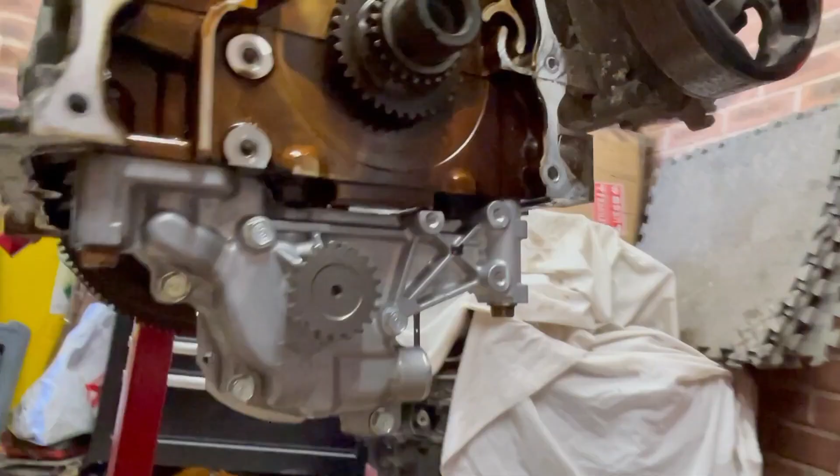As some of you may be aware, on the K24 there's a huge oil pump which has a balance shaft in it, and in order for it to be a bit more free revving, you fit a K20A2 or the oil pump off of a K20Z. We had to do a bit of notching on this oil pump, because otherwise it doesn't fit with the K24 girdle.

All I'm waiting on is an oil pump chain, and I've already got the tensioner for that. We've got a few goodies that have just arrived, but we need to get that chain in place before I can actually put all the guides on for the timing chain and the tensioner.

Today I picked up some K20A2 cams, because in the K24 A3 the cams are all right, I think mainly for boost applications, but this is going to stay NA for the time being. We've got a few other tasty little bits which I'll show you.

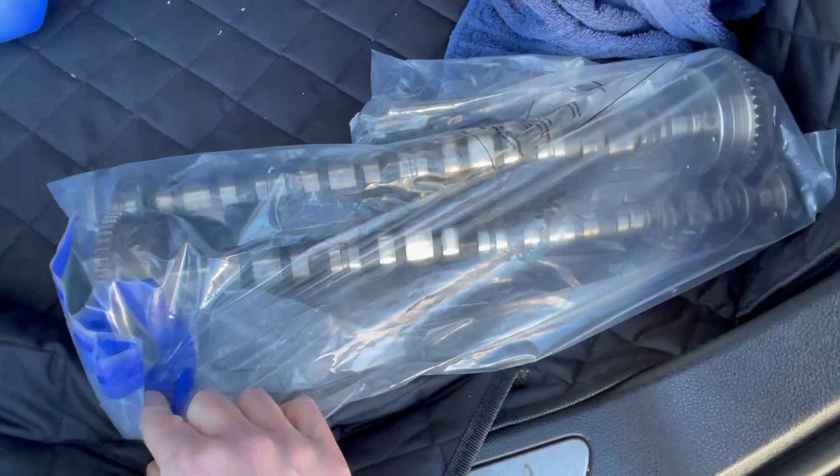As well as those other bits, ignore the carpet samples, I've just been today to pick up the K20A2 cams with the K20A2 VTC gear. This will be perfect for the K24, giving us a bit more capability of revving higher, and plus these are a bit better of a cam to put in the K24.

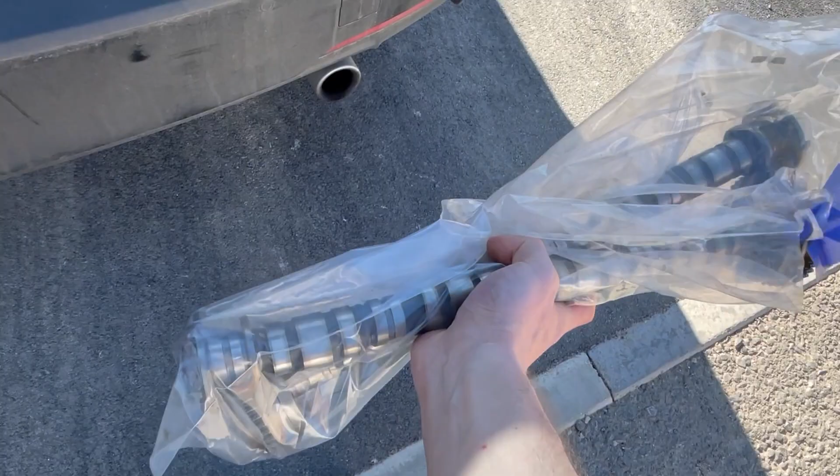All I'm going to do is just clean them up, give them a quick wipe down, get these added in and put the retainers on, then should be able to just put the cam cover back on to keep it sealed up a bit more from dust, then we'll move on to something else while I wait for the other bits to come.

Siri's trying to talk to me. I didn't catch that, could you try again? We're filming some YouTube here, lad. What's going on? Okay, searching for YouTube on the App Store.

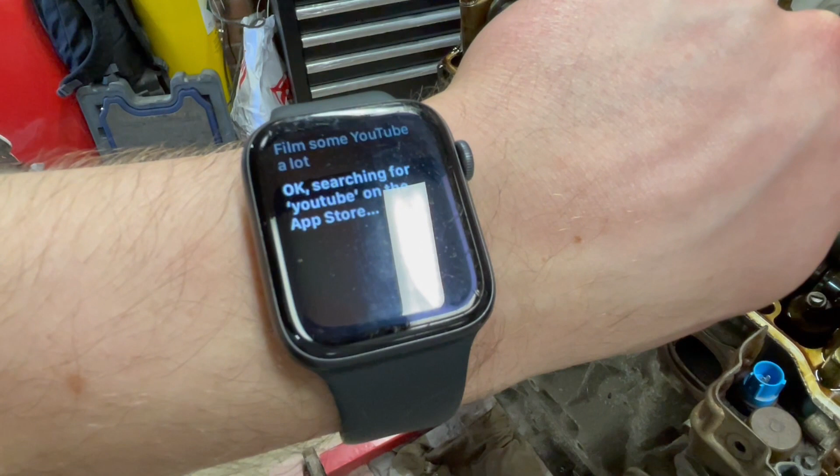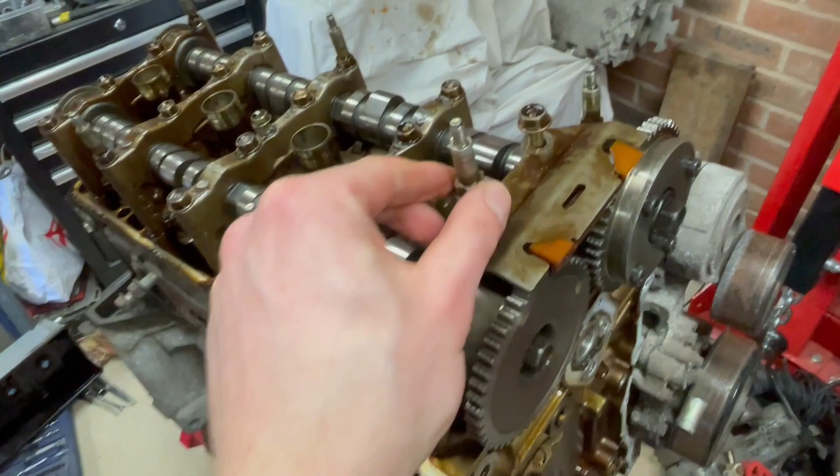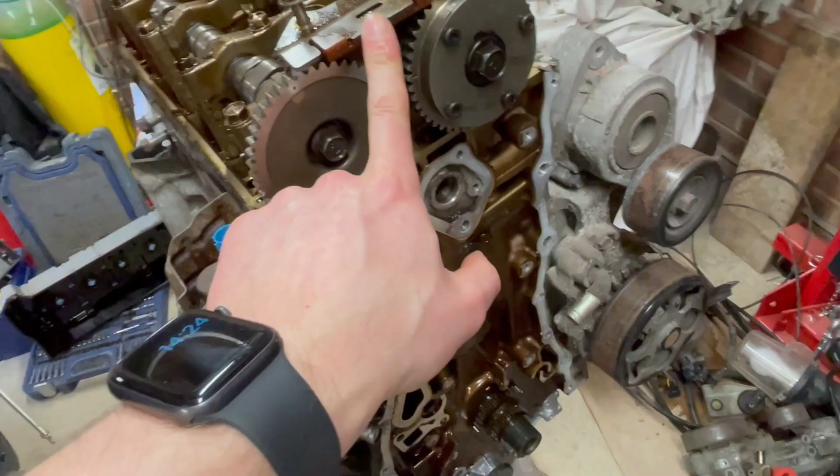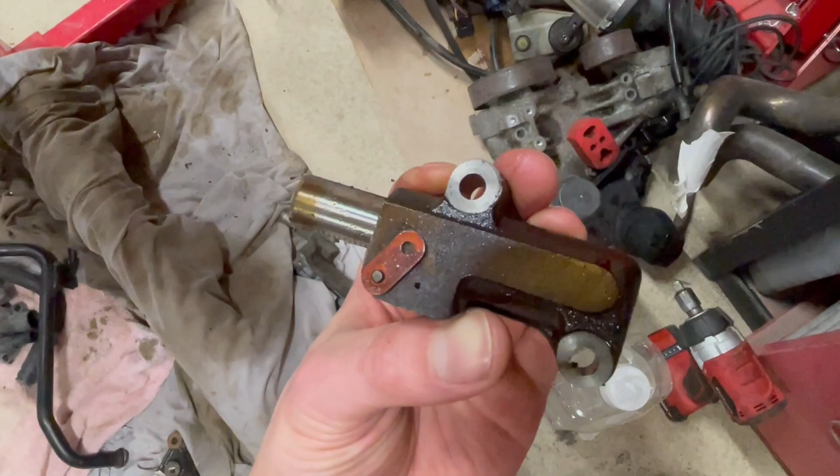I've got a new one, so I don't want to put any of the new bits on just yet until I get my tensioner. You can see the old tensioner just sat there, covered in whatever that is. Got a new one of these on order, still waiting for it to arrive. Once I get that, then I can at least put all this together, as well, like I mentioned before, the chain for the oil pump.

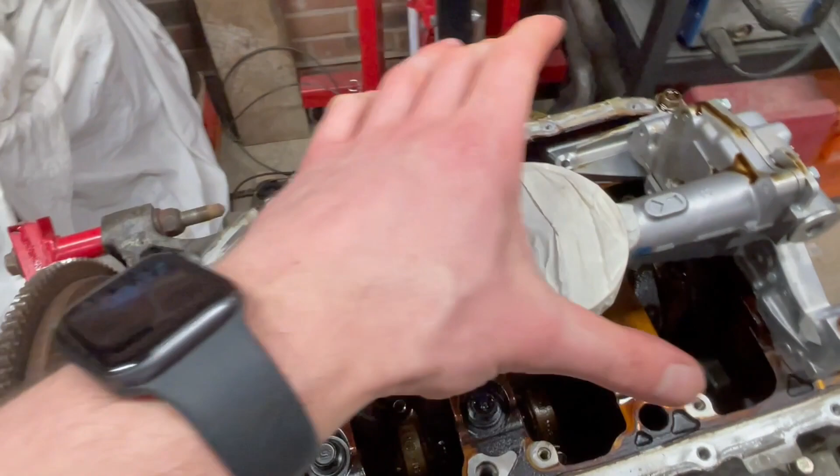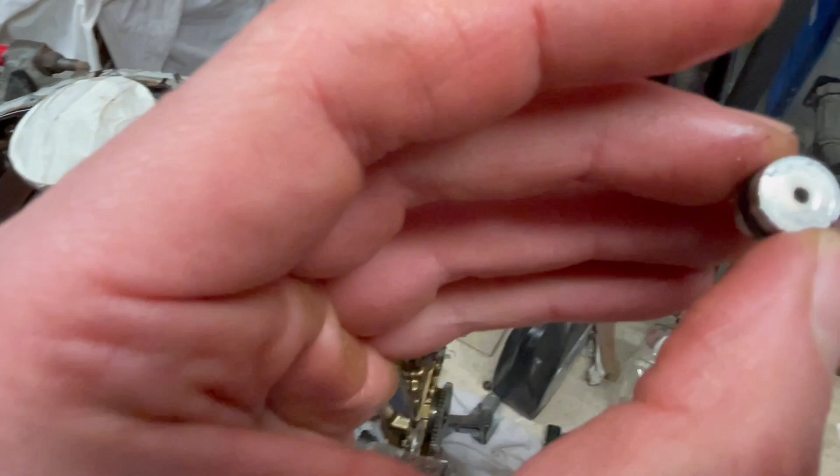So now we've spun it over. The reason why I wanted to show you is that on the K24, I've already taken it out, but when you have this huge oil pump, you have - makes me get my trusty pencil - this little jobber. It's a little bung, well, it's not a bung, it's got a tiny little hole in the middle of it. So this sits here on this one.

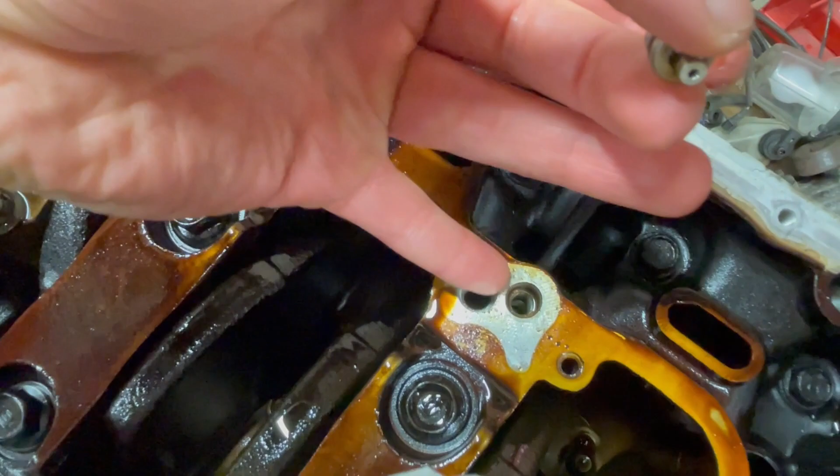If you don't blank this off - you've probably heard it quite a few times - but if you don't blank that off, you get a drop in oil pressure because there's nothing there to receive the oil out of this. So what you have to do is block it up and seal it up with a bit of Honda Bond.

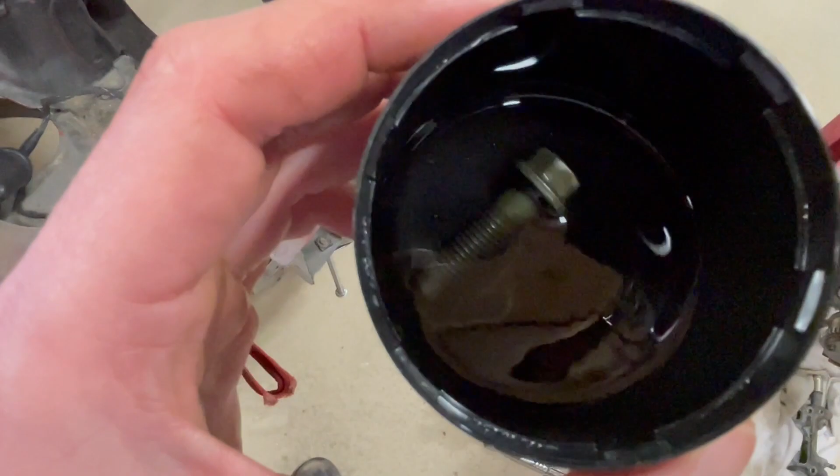Went through my trusty rusty bolt selection and come across this lovely bolt. I think it's probably from an MX-5 that I had before, God knows where it's from. I've sat it in some thinners just to make sure there's no nasty stuff on it, and bung that hole up, that tasty one there.

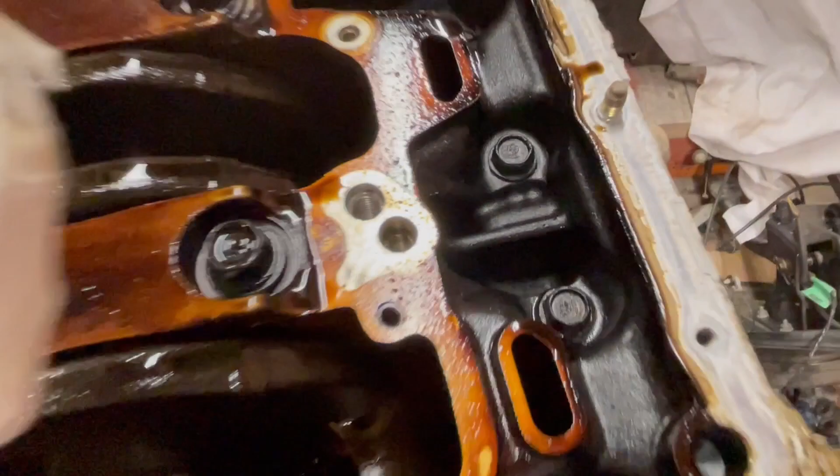Bung it up with a bit of Honda Bond, and then we're pretty much good to go. So like I said, we're still waiting on some bits, so obviously I don't want to put the sump on just yet, so it's a bit of a pain in the ass because I just want to get on with it. But it might be a couple of days yet. There are a few things I can do, like cleaning up the faces on the engine and stuff like that, but otherwise we're going to be focusing on the actual shell. So what I'm going to do, get this bolt in there.

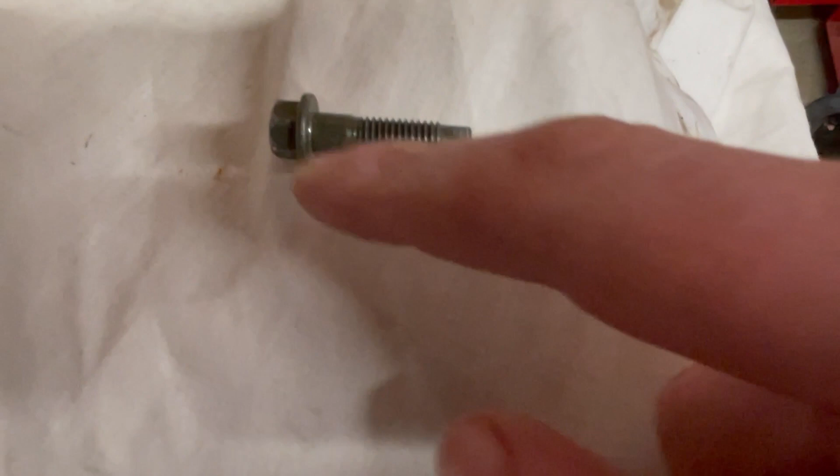Job's a fish. So if you want to know for reference, bolt wise, the bolt is an M8, so there we go, 8mm. Lengthwise is roughly, the one I'm using, around 30mm. It's got this little dolphin nose on the end, so it fits quite nice, and it's got this little shoulder on it. You can just use a straight threaded bolt, but providing it's got something like a top hat to it, like this one, so it's just enough to blank over the top of this.

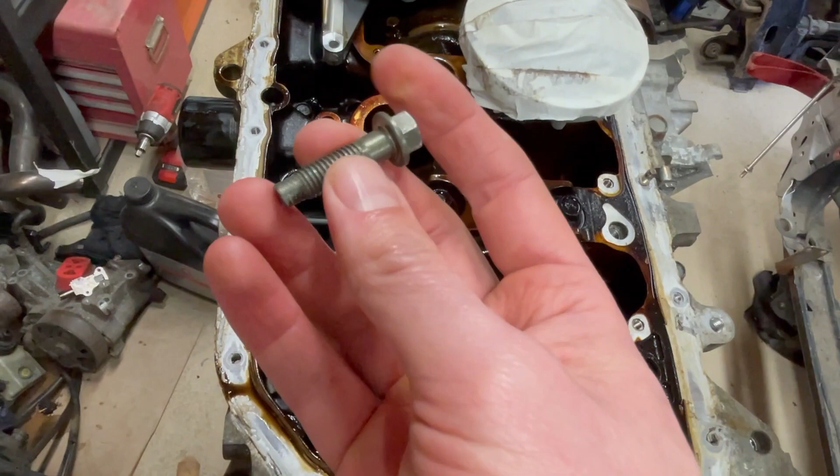I've just given it a bit of a clean, a wipe down again with a bit of paper towel and a bit of thinners on there, just to make sure it's clean enough. So I'm going to bob a bit of Honda Bond on the threads, and then put the bolt in, tighten it up quite nicely, and that'll do the trick.

Right, so that's that in, all tightened up now. It's got Honda Bond on the threads, and I've managed to put some in there - you see on that bolt hole you've got a bit of a shoulder in there as well, so I've put enough in there so it fills the shoulder too. It's all underneath here, and I've just wiped off the excess so that's nice and clean, so we're not going to get any floaters knocking about. I think that's about as much as I can do for now on there.

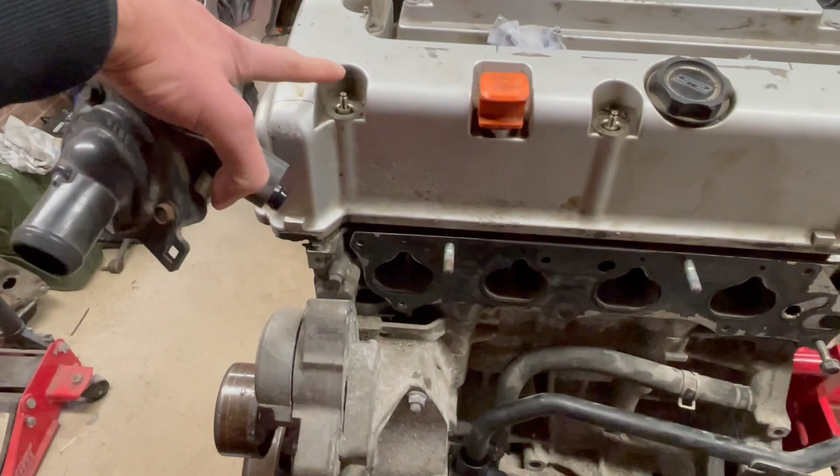Right, so we've got the engine span over, so we've got it all covered up on top. I've tightened those bolts down just so I can actually get the cam cover on properly.

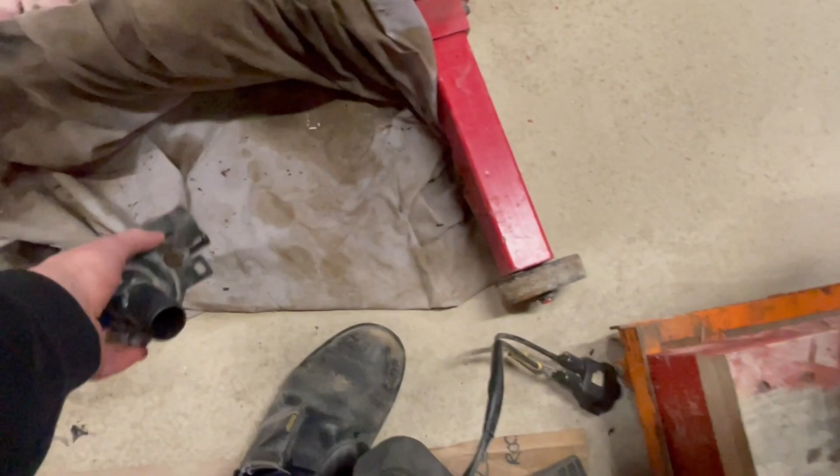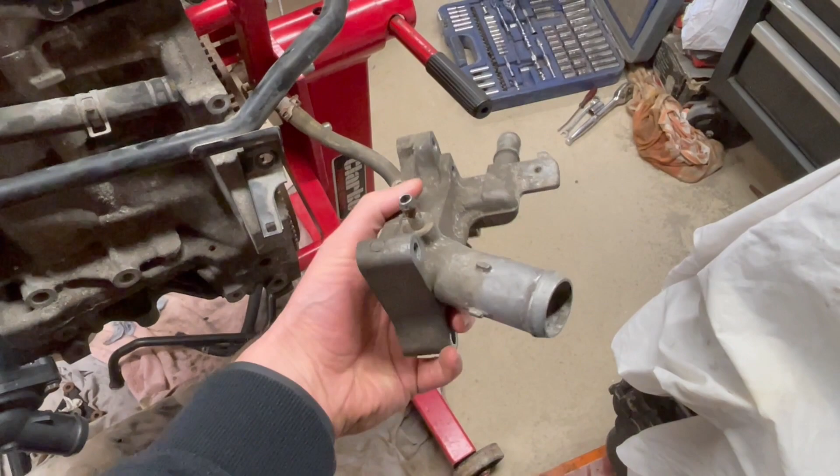And what we have here, thermostat housing - I've just put it on for showing - is I've swapped out the K24 water pump housing. So this is a K20 version, off of this engine, with the K24 pipes added to it. I've changed that because on the K24 version the nose or the snout points up, which means if I have the K20 version on the K24 block, I can use EP3 hoses since it's an EP3. I think I'll probably end up replacing this out when I come to put the K20 in the Williams, probably with this one or maybe a K-tune one later on. So that's no good, don't really need to use this anymore. You have to put the K24 hoses back on because with the K24 you have this water outlet that bolts on the side of the head, and the pipe goes around it. On the K20 you don't have that problem.

So that's a bit of K24 knowledge there. If you're wondering why I wanted a K24 rather than a K20, the K24 has really good performance, better low end torque. It doesn't rev as high, probably into around 8,000 RPM - we'll soon see when we come to do dyno pulls and stuff like that. But yeah, going to use the K24 purely for the lower end torque.

This car will be NA to start off with. There is a plan to use a Rotrex supercharger later on, but all I want to do, because I've never driven an EP3 on track - obviously I've driven Mark 1 Clios before - is get used to the car first, know its behaviours and stuff, then start upping the power afterwards. So we should be good for around, I don't know, 250 horse, the usual standard Honda outputs, maybe a bit more, but you'll have the higher torque figure at the bottom end of the RPMs. So yeah, that's the reasons.

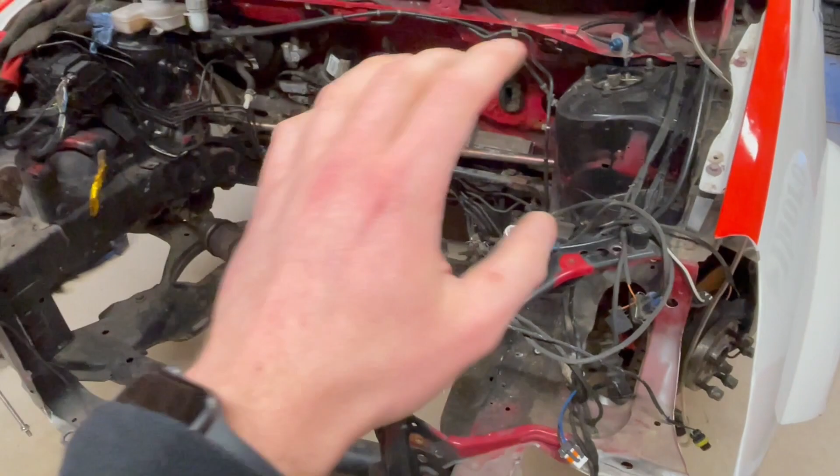So the next bit now is I'm going to jump over to the time lapse, because I'm pretty much done with that. Just going to put a sheet over it to make sure it's dust proof, and we're going to start stripping this down, because I do want to get this engine bay painted and looking nice, because I like things to look nice.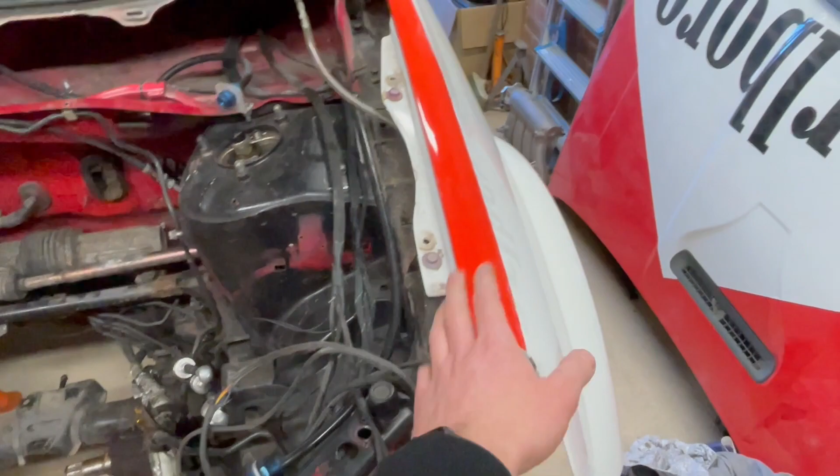So I'm going to get the wings off and get the rack out, get the brake system out, just out of the way, so we can make all this redness white. I think we're actually going to go white this time rather than grey. I think it'll match with the engine bay, plus the touring cars did the same - they were white on the inside, just grey on the cabin. So yeah, let's get at it, let's start stripping it down.

Start with the K24. First observation was the cam. So no, the first thing we did was I put the K20 cams in, and really it's only the K20 inlet cam that we need, so we believe. So we're swapping that out - well, we swapped that out. That's all torqued down now, apart from these two, so we just need to get the guide on top there, but we need to get the chain on with a tensioner.

But also we're just going to do the oil pump side now. The K20 pump does more revolutions for more RPMs coming. So we're just going to flip this over, get the guides on, the tensioner, the chain, everything else, get all that buttoned up, and also get the windage tray in, get that all sorted.

Got some HB? Got some Honda bond, yeah. That's all right, got plenty of Honda bond. That's all you need, if you've got enough of that you can put it together. Maybe we just stick it together with Honda bond. Yeah, I could do that, maybe we need them here.

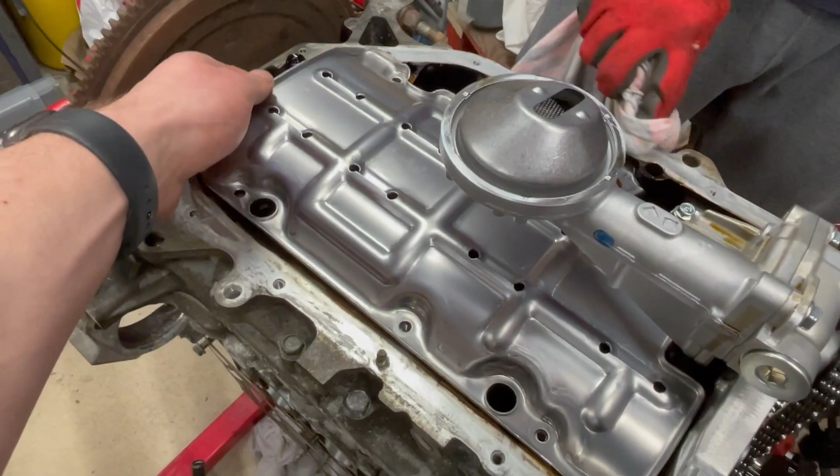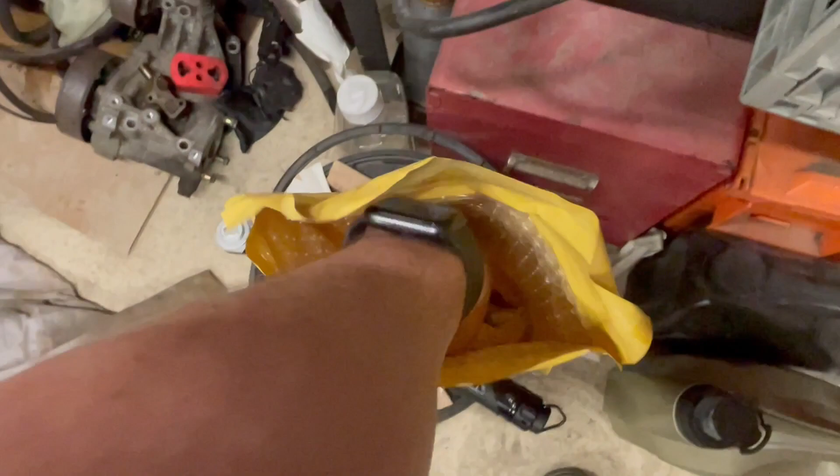Right, so we've just fitted the oil pump chain, just need to put the tensioner on. Just torqued up the new oil pump guide, got a new windage tray - this is from a K20 - and just bolt it straight onto here. As I've shown before, that's all plugged up, that little gallery. This was a kit from Clockwise Motion, and they send out a full kit which has got all the bolts and everything in individual packets. So we're just going to replace a few of these.

So we've got all these little bolts that got to go in here. We're always just having a good old clean up, aren't you, lad?

Time to clean as always. Yeah, that's it, get its mating face nice and clean.

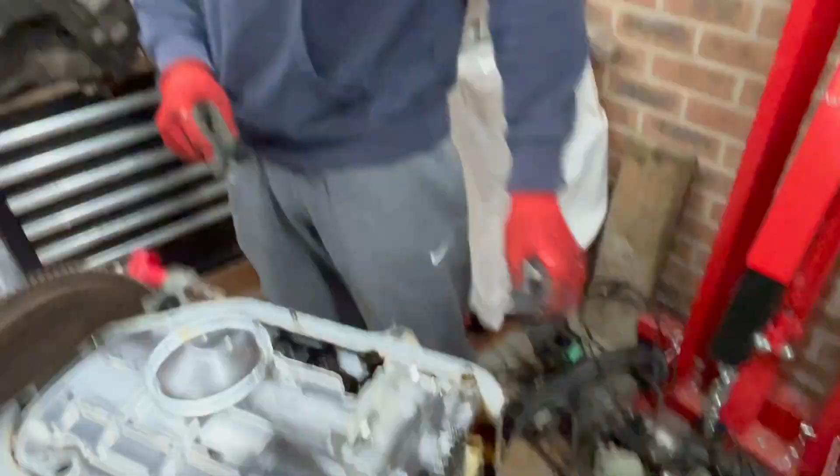Then I end up cleaning my own stuff and then I end up doing everyone else's. Mate, you enjoy this type of thing. I do, mate. Mate, you do. I don't, I just can't see it not done. Mate, straight off you're like, oh I just want to clean this. I don't remember that conversation. There was definitely that conversation.

So yeah, we've got a Blox sump baffle, that's got to go on yet. So we've got some spacers and stuff which sit off these bolts, so I think we might have to replace some of these. Definitely use the instruction manual for this - there we go, got a kit of spacers and all sorts of stuff and a nice little manual.

So where did you get that from in the end? This is from Tegiwa, I think. Nice Blox sticker in there. So we just need to crack on with that.

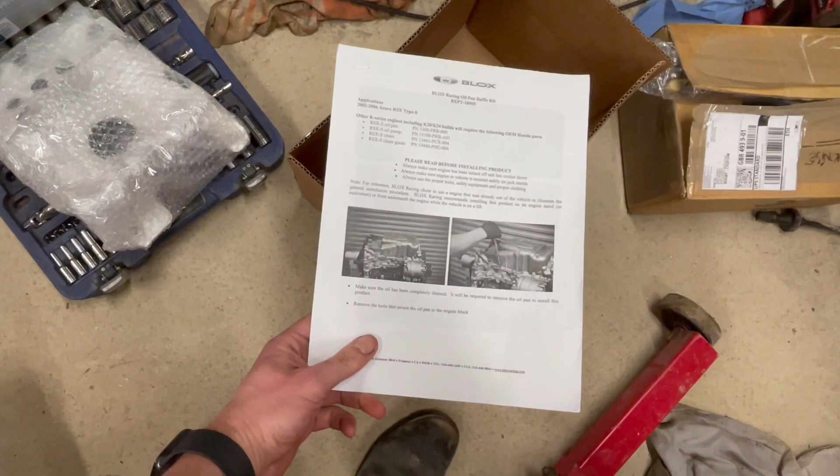And here we have the Roy Bailey cleaning the K24 mating surfaces. Killing his back, too old for this shit.

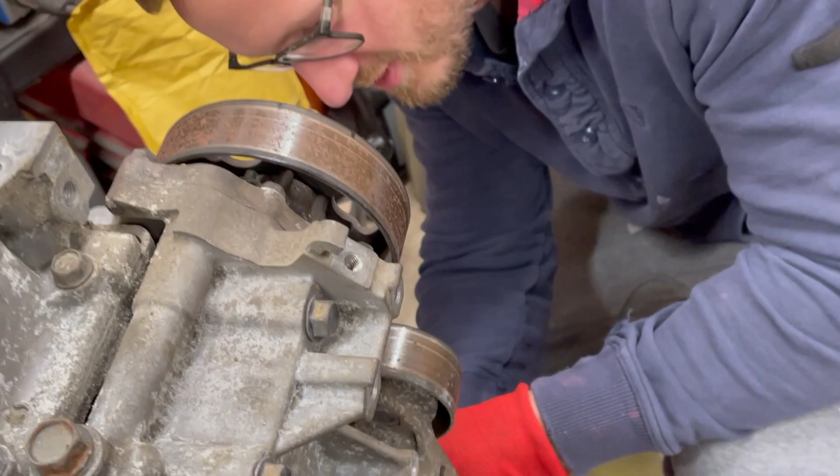It's easy with a bit of brake cleaner, mate, but you know. Well, we don't have brake cleaner, we only have thinners and a knife. A kitchen knife and thinners and a bit of spit. Mate, it's how you build K24s.

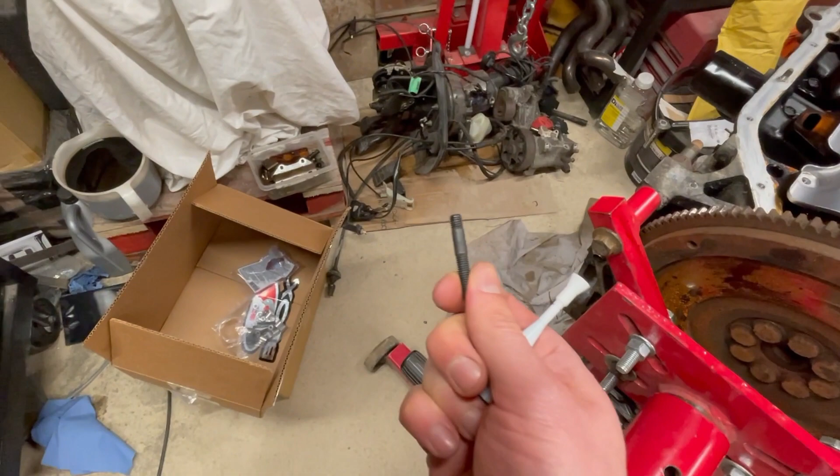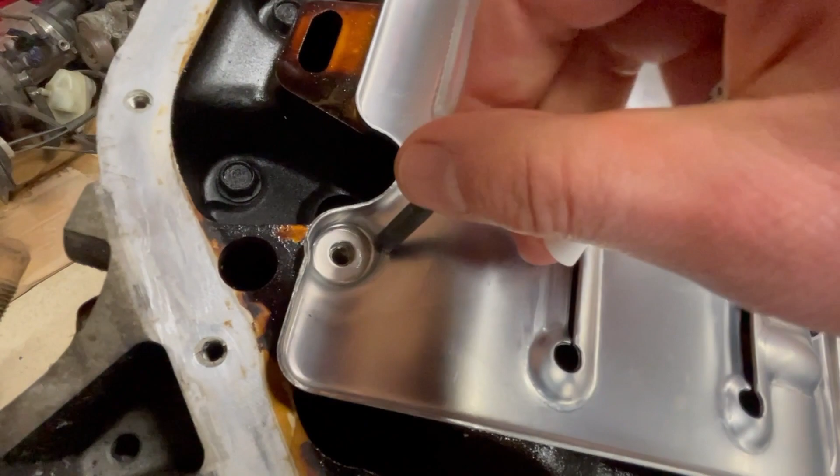So here we have the Blox fitting kit. So we have 6 of these studs, Loctite 242, so we'll put a bit of Loctite on the end of this thread. Bit of Nigel Loctite. And we will add the stud into each of these orifices. I would do that on camera, but I only have one hand, so please bear with. And here we have it, sports fans - the studs with the thread lock are now in.

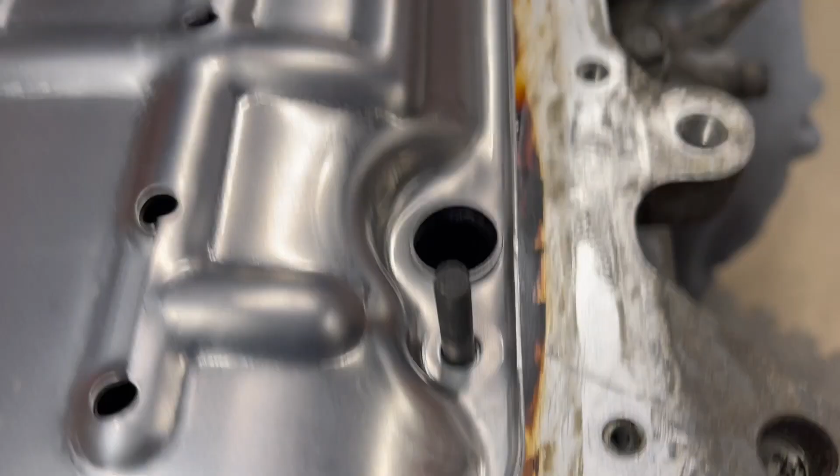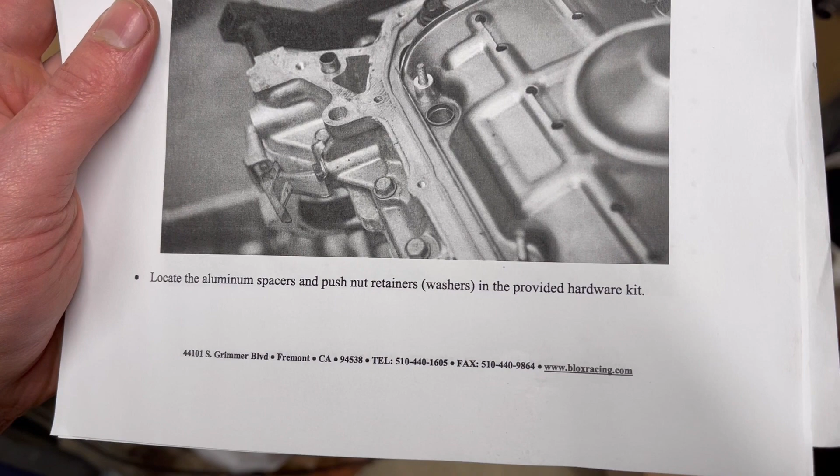So next on the Blox instructions, we have to locate the aluminium spacers and push nut retainers, also washers, in the provided hardware kit. Okay, let's do that, trying not to drop any of these in the engine. Ding ding, like the sound.

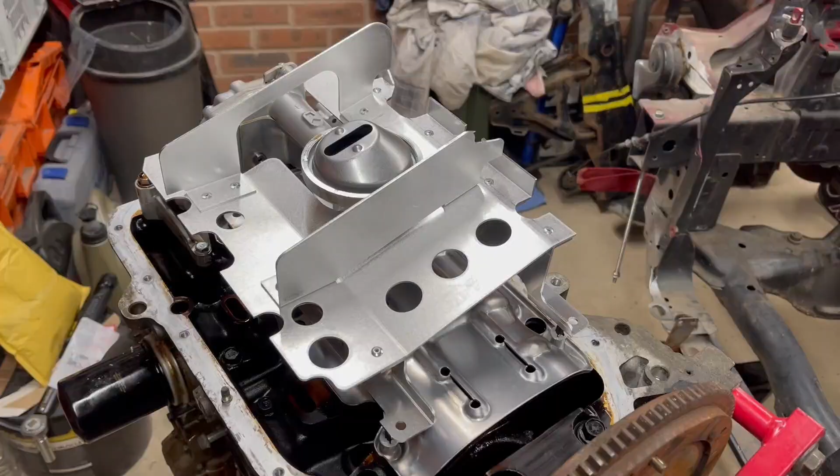Try and do a Bill Oddie voice. Not Bill Oddie, it's not Bill Oddie at all, is it? It's David Attenborough. Try and do some Attenborough.

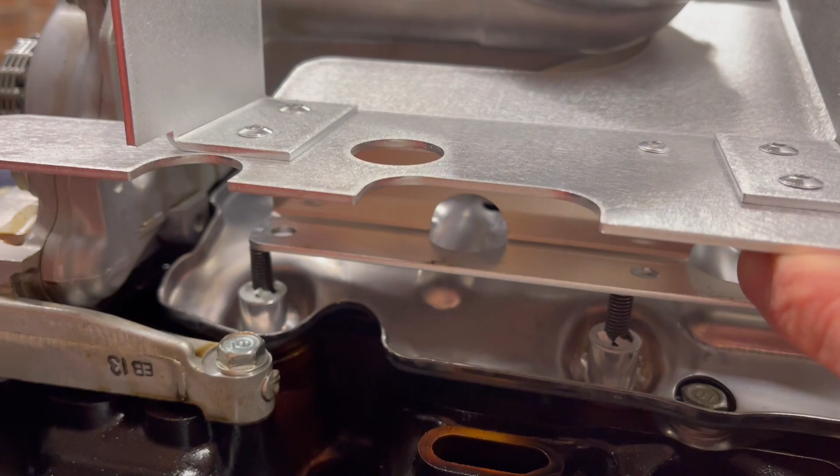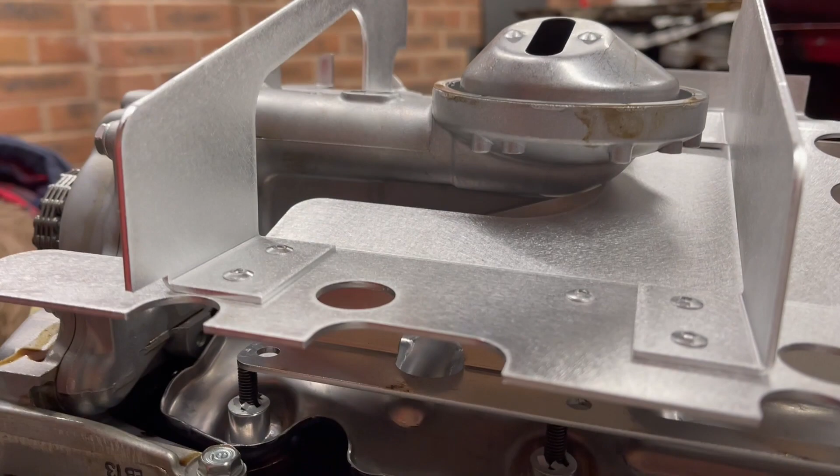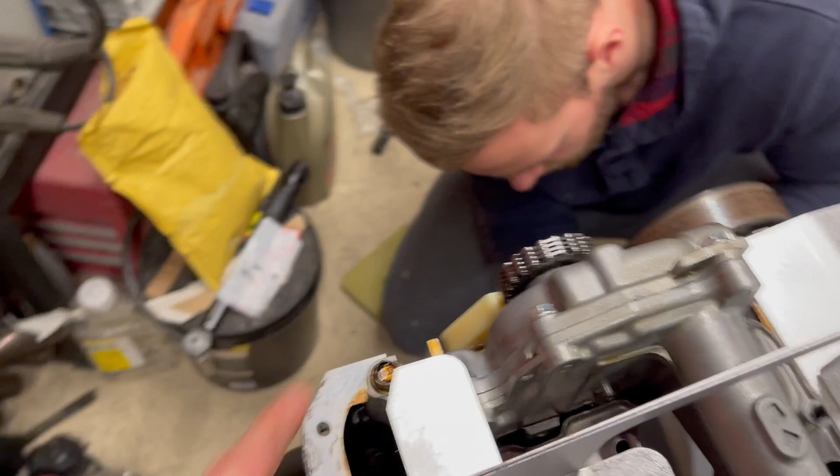Here we have the Blox oil sump pan baffle, and we can't fit it because the oil pump is in the way. There's a little bit of contact going off, and you can't get the baffle over the pins. So we have to undo the oil pump just to tilt it up ever so slightly, and we'll get this beast on.

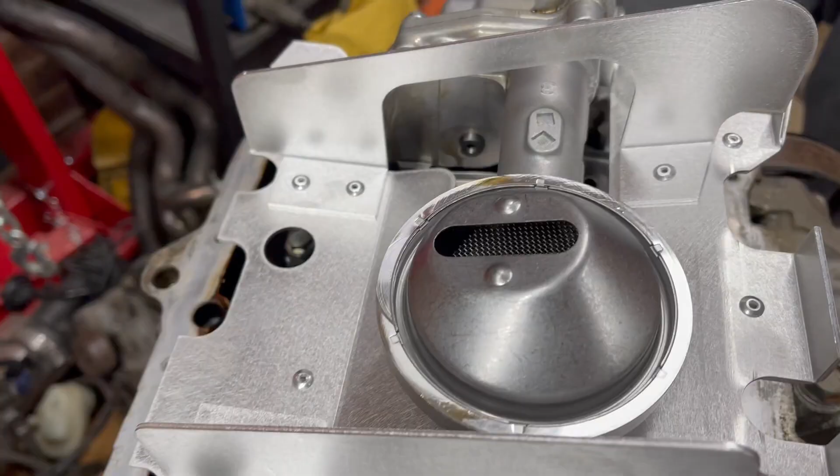And there we have it, sports fans. So all we need to do is add these nuts to all these studs, but it doesn't actually mention anything in the instructions about adding thread lock. I don't quite fancy having one of those nuts come loose in there, because I think that would be quite catastrophic. Guaranteed that would find its way into the engine somewhere.

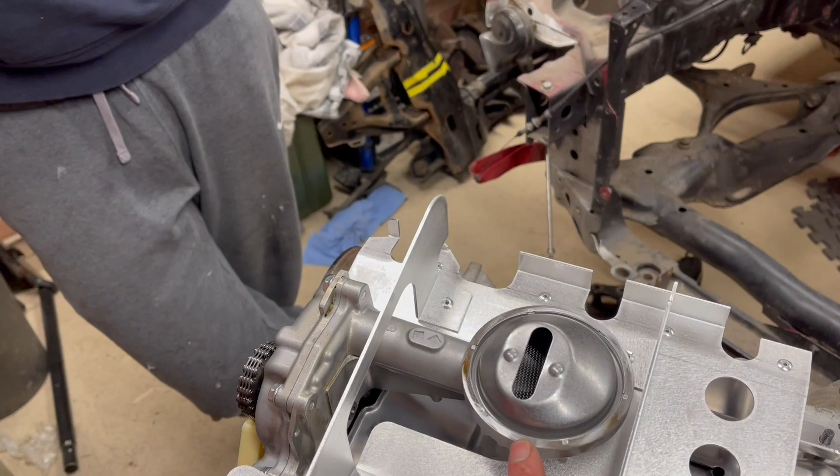So put a bit of thread lock on there, and then we're going to wind these down, and then we're pretty much done. Access wise it's not too bad, but you can't really get at any of the bolts - you have to undo these to get this on. Maybe if you use a different oil pump it might be slightly different. I think they're all pretty much the same, unless you've got...

I think they're all based off a Honda OEM pump, even the upgraded ones. That's a bit of consumer advice there - you can't really get at your bolts, so you have to do a bit of jiggery pokery. But we'll get that on, and then we should be good to go to get the sump on, because Roy's done a fantastic job of cleaning. Thanks, mate. We'll get some Honda Bond on there and get it slapped on, and we're good to go.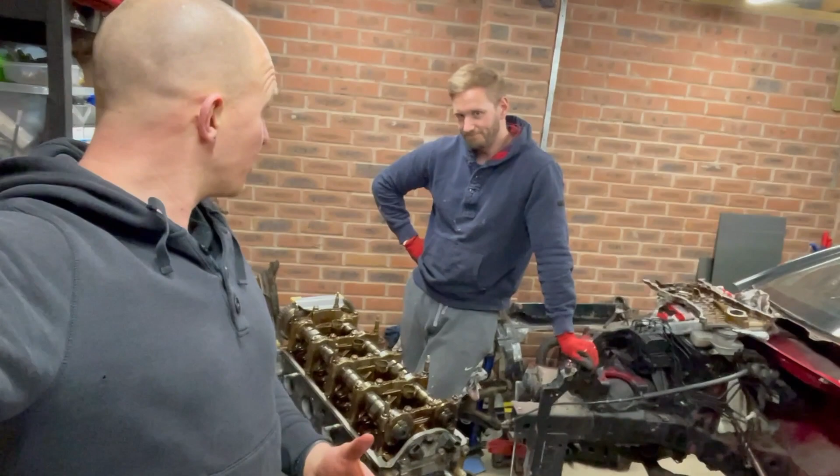Right, sports fans, the time has come where we've got the timing chain on, all the chains on, the oil pump's on, the baffle's on. So all we've got to do now is pull the nice little green pin.

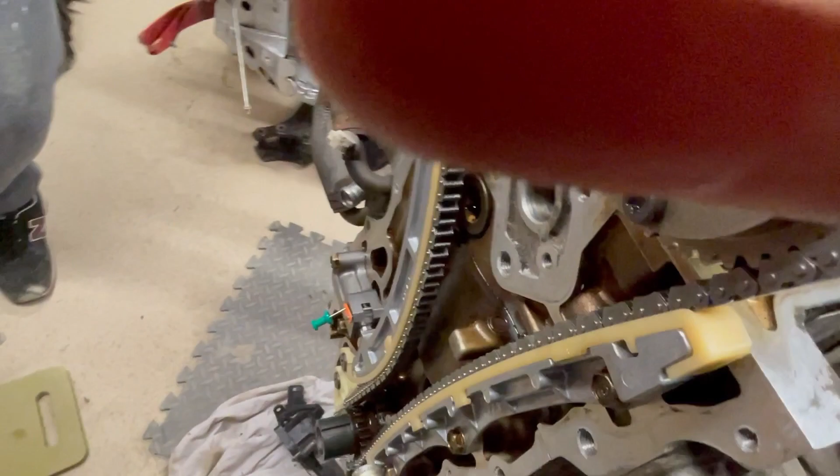So we've got the green pin - grenade pin, the grenade pin. Nothing wrong with it, right? We've got all new Honda guides, tensioner, new tensioner, chain, new Honda bits, and so there it goes. Anticlimactic, wasn't it? Didn't go boom or anything like that. I think we're alright so far.

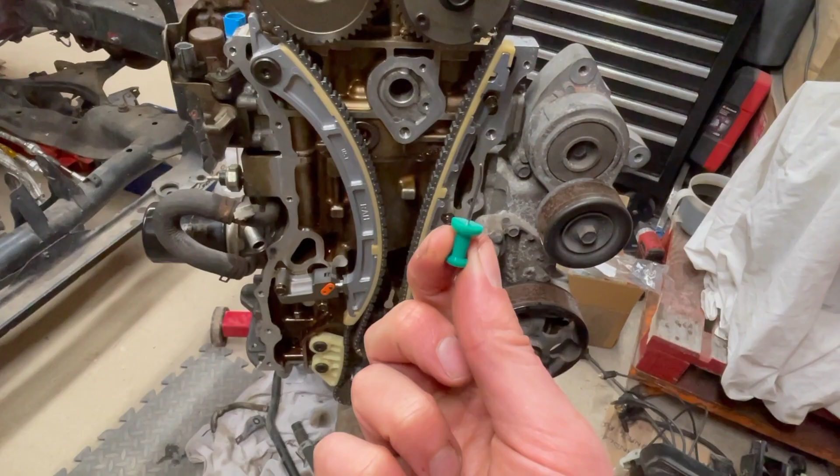So yeah, remember high school? Yeah. So we're on, we're ready. So the timing chain is now on.

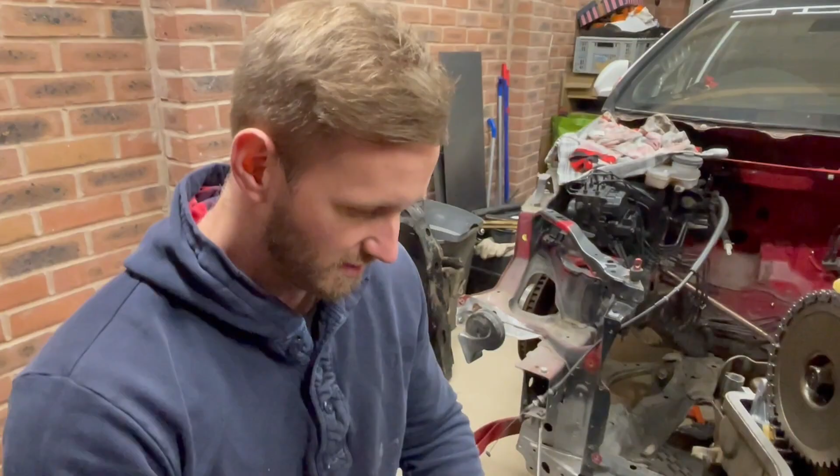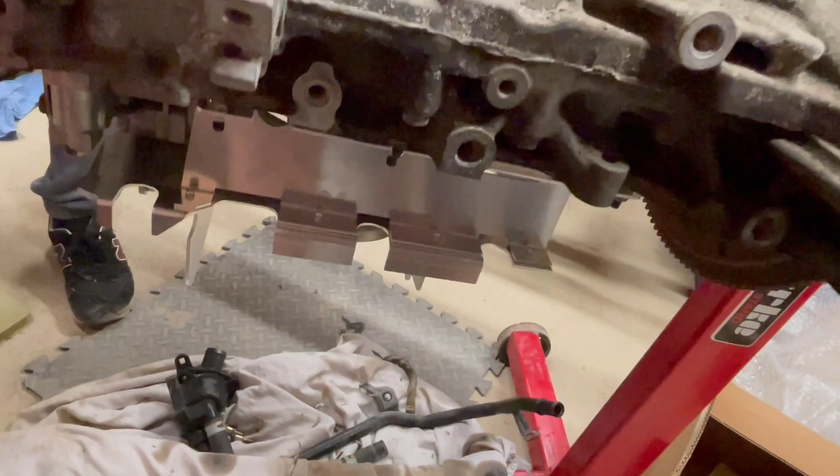Using the calibrated quarter inch ratchet - right hand calibrated torque. That's it. You can just see a bit of squidge of Honda Bond there, used a full layer all the way around this, and just wipe that down ever so slightly. Perfect. Next thing, got to get the sump on, and get a bit of Honda Bond all the way around that as well. Have you got that? And we can put the cam cover on.

Right, and here we have it, sports fans. So it's now no Capitol, no sponsored by Capitol - we've got Mowgli on there instead. So it's now 25 to 12, and the K24 is now just about ready.

It's not completely ready, got to do a bit more cleaning up. It's ready - mechanically it's ready, all torqued to spec. Just needs a little bit of a clean up. Obviously it's upside down, that's not the top of it, that's the bottom of it.

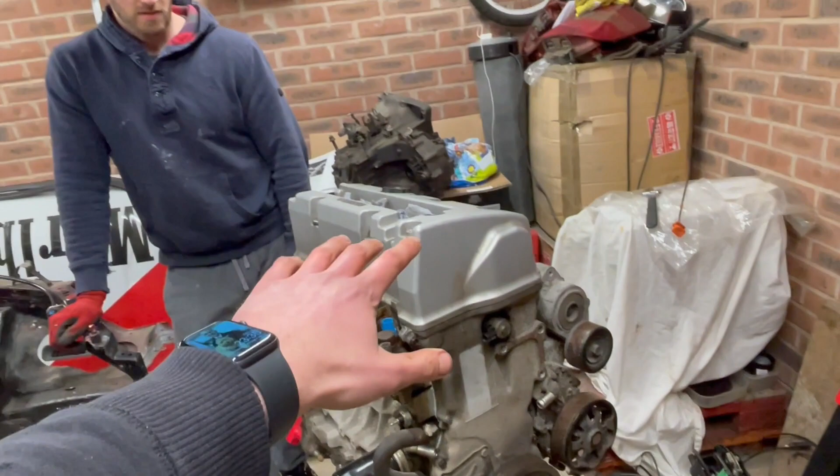Just giving this a quick lick of paint, as it had a few scratches on the sump. But we just need to spin it over. Right, so she's flipped over, and we've got the cam cover on as well. We've just got a few bits to do, but everything else is done. So we've got the K20 inlet cam with VTC gear, new timing chain for both the oil pump and overall timing chain, brand new guides, brand new tensioners, brand new oil pump, and brand new Blox oil baffle.

Snug fit, very extra snug - it's a very snug fit. We had to really squeeze this sump pan on. It put up a little bit of a fight, but we got it on in the end, and we're just about there now.